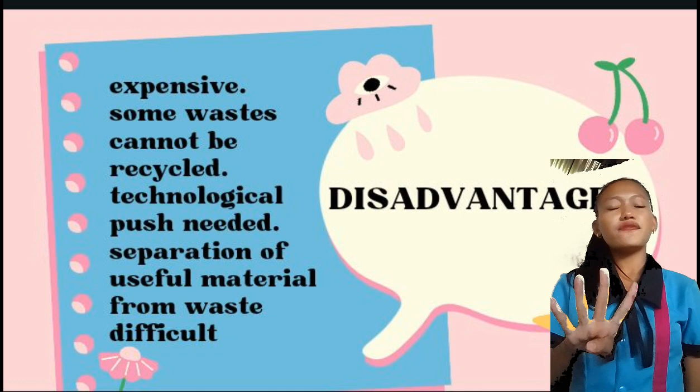But the disadvantages of this are: it's expensive, some waste cannot be recycled, technological push is needed, and separation of useful materials from waste is difficult.

Incineration is a method of waste treatment involving the burning of organic materials found in waste. Incineration and other high temperature waste management processes are called thermal treatment.

Waste incineration involves converting waste materials into ash, flue gas, and heat. The ash mostly consists of inorganic components of waste and can be in the shape of solid lumps or particulates carried by the flue gas.

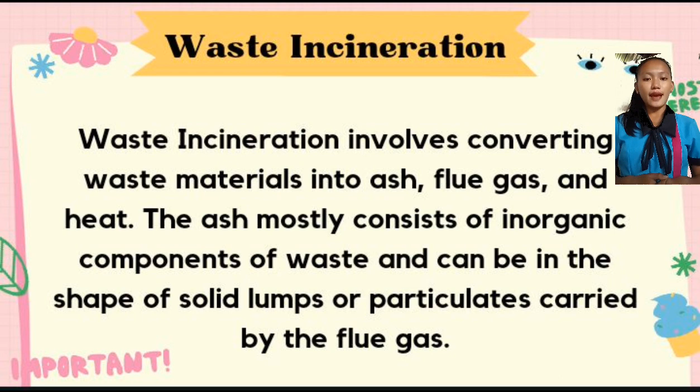The advantages of waste incineration are: reduced quantity of waste, efficient waste management, production of heat and power, reduction of pollution compared to landfills, reduced reliance on transportation, better control over odor and noise, and prevention of methane gas production.

But the disadvantage of this is that due to increasing quantities of waste sent to incineration, incinerators will emit more toxins and pollutants that harm local air quality. Incineration makes a more significant negative contribution to local air quality than landfill.

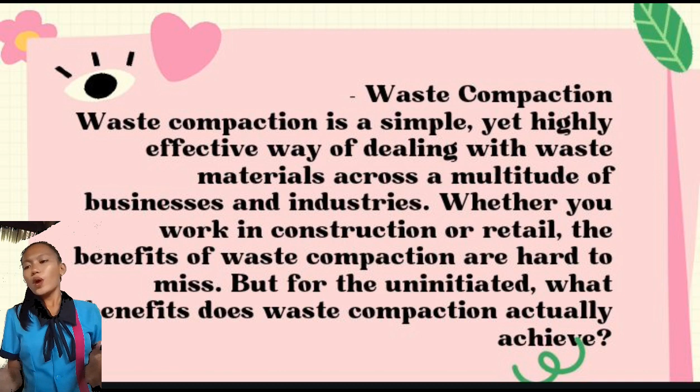Waste compaction is a simple yet highly effective way of dealing with waste materials across a multitude of businesses and industries. Whether you work in construction or retail, the benefits of waste compaction are hard to miss. But for the uninitiated, what benefits does waste compaction actually achieve?

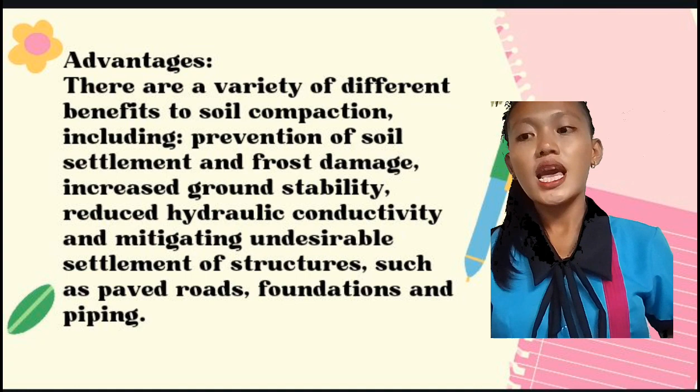The advantages: there are a variety of different benefits to soil compaction, including prevention of soil settlement and frost damage, increased ground stability, reduced hydraulic conductivity, and mitigating undesirable settlement of structures such as paved roads, foundations, and piping.

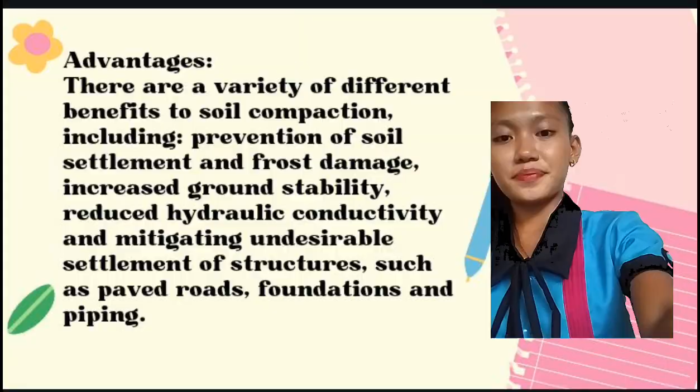There are disadvantages of it. To reduce landfill impact, segregating your waste allows your business to recycle more items, preventing them from ending up in landfills. This, in turn, reduces your overall impact on the environment.

Biogas generation is growing steadily, as more people are setting up biogas plants to produce biogas. Here are some advantages and disadvantages of biogas that will help you make your mind up about it.

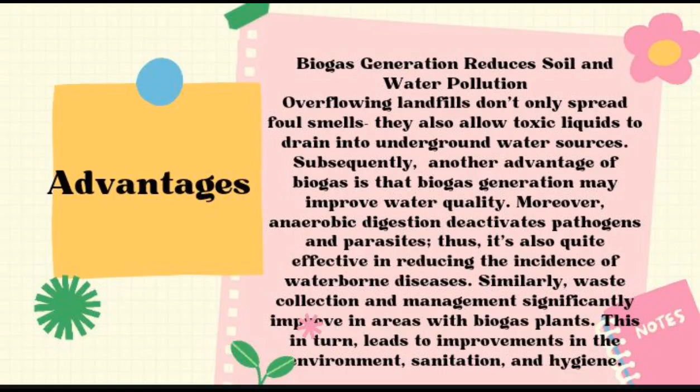Biogas generation reduces soil and water pollution. Overflowing landfills don't only spread foul smells, they also allow toxic liquids to drain into underground water sources. Another advantage of biogas is that its generation may improve water quality. Moreover, anaerobic digestion deactivates pathogens and parasites, making it also quite effective in reducing the incidence of waterborne diseases.

Similarly, waste collection and management significantly improve in areas with biogas plants, which in turn leads to improvements in the environment, sanitation, and hygiene.

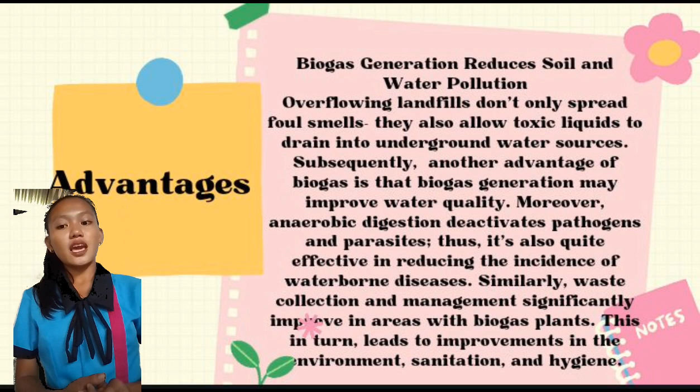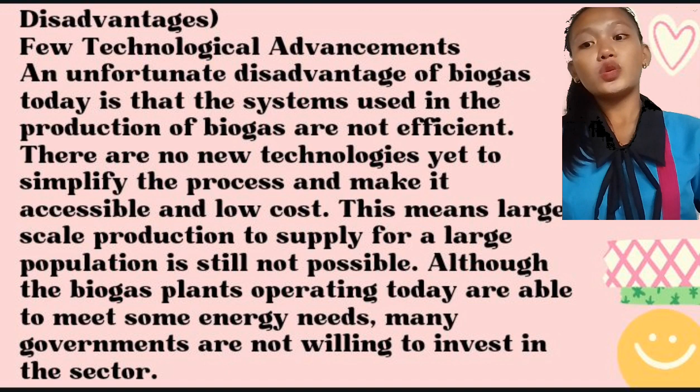The disadvantages of this: few technological advancements is an unfortunate disadvantage of biogas today, as the systems used in production are not efficient. There are no new technologies yet to simplify the process and make it accessible and low cost. This means large scale production to supply a large population is still not possible. Although biogas plants operating today are able to meet some energy needs, many governments are not willing to invest in the sector.

Biogas also contains impurities. After refinement and compression, it still contains impurities. If the generated biofuel was used to power automobiles, it could corrode the metal parts of the engine, leading to increased maintenance costs. The gaseous mix is much more suitable for kitchens, stoves, water boilers, and lamps.

The advantages of this are: it improves the structure and health of your soil by adding organic matter, helps the soil retain moisture and nutrients, attracts beneficial organisms to the soil and reduces the need for pesticides and fertilizers, and reduces the potential for soil erosion.

The disadvantages are the drawbacks of composting by-products: cost for site preparation and equipment, the lengthy treatment period, targeting final use of the compost product, and environmental issues such as odors and dust. Some investment in equipment and site preparation is required or recommended.

Composting advantages: vermicompost has a plethora of benefits, most importantly as follows. One, it acts as a biofertilizer, restores soil nutrients, stabilizes soil, and enhances soil fertility over a long-term period. Two, it addresses soil issues and recycles waste. Three, it is shown to be a profitable enterprise as part of a circular economy.

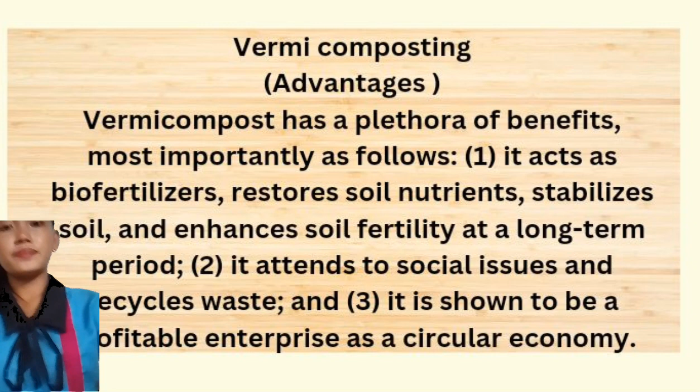The disadvantage is composting takes time. It can take as little as 3 months or as long as 6 months for earthworms to digest the organic matter and turn it into a usable soil amendment in a vermicomposting bin. Other issues can be high maintenance, pest and pathogen problems, and careful harvesting.

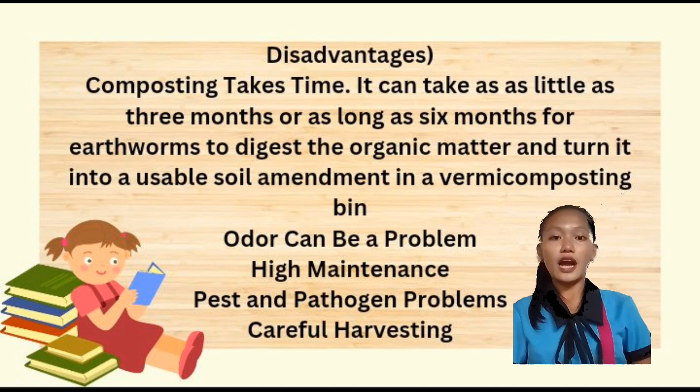So let's proceed to solid waste management examples. There are many examples of solid waste management given in the module. Let's talk about it.

Sources of solid waste, or solid domestic garbage: domestic waste includes food waste, paper, glass, metal, plastic, textiles, and many more. A large part of domestic waste consists of plant and animal waste, such as vegetables, fruit peel, bone and meat waste, and chicken and fish waste, which are considered wet waste.

Waste material from various industries: types of industrial waste include dirt and gravel, masonry and concrete, scrap metal, oil, solvents, chemicals, scrap lumber, even vegetable matter from restaurants. Industrial waste may be solid, semi-solid, or liquid in form.

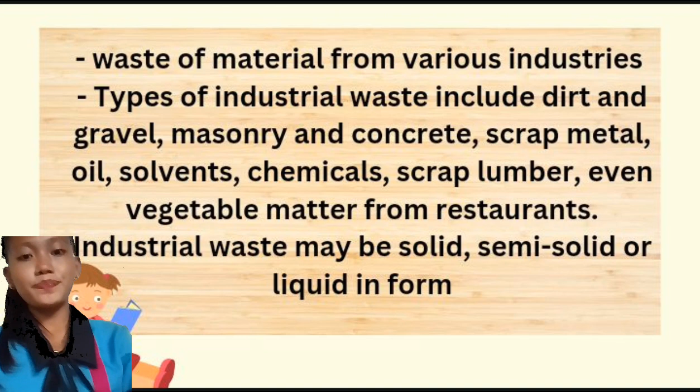Solid agricultural waste is produced as a result of various agricultural operations. It includes manure and other wastes from poultry houses and slaughterhouses, harvest waste, fertilizer runoff from fields, pesticides that enter water, air, or soils, and salt and silt drained from fields.

Other examples include plastic, glass, metals, e-waste, fridges, freezers and other cooling equipment, computers and telecommunications equipment, consumer electronic devices, solar panels, TVs, monitors and screens, LED bulbs, and vending machines.

Medical waste includes medical sharps such as needles and syringes, disposable masks, used bandages and other dressings, body parts removed during surgery, samples from tests like blood, urine, or stool, chemicals in treatments or tests, and contaminated medical devices. Those are the examples of medical waste.

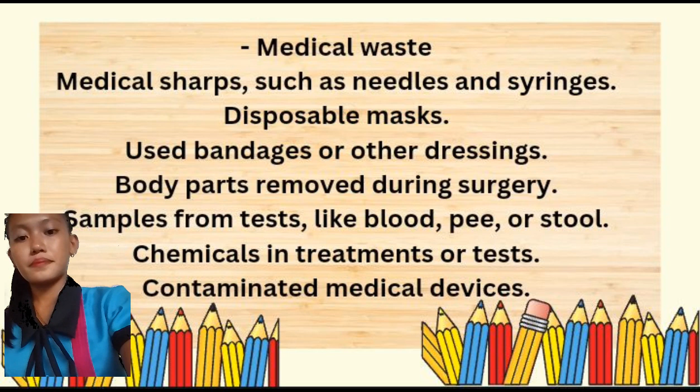Construction waste and sewage sludge: the term sewage describes raw sewage, sewage sludge, and septic tank waste. Raw sewage is mainly water containing excrement, industrial release, and debris such as sanitary towels, condoms, and plastics. Excrement is the major source of harmful microorganisms, including bacteria, viruses, and parasites.

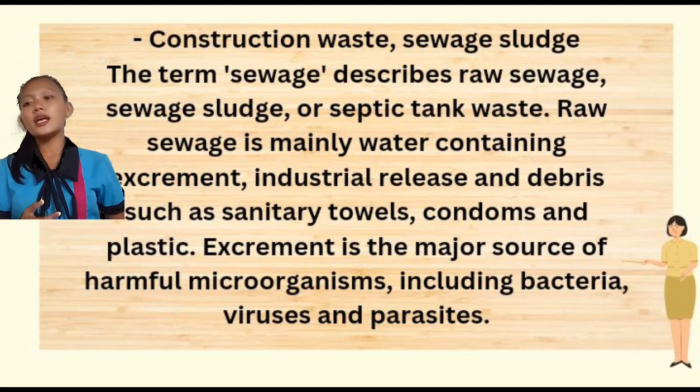Effects of poor solid waste management: poor waste management, ranging from non-existing collection systems to ineffective disposal, causes air pollution and water and soil contamination. Open and unsanitary landfills contribute to contamination of drinking water and can cause infection and transmit diseases.